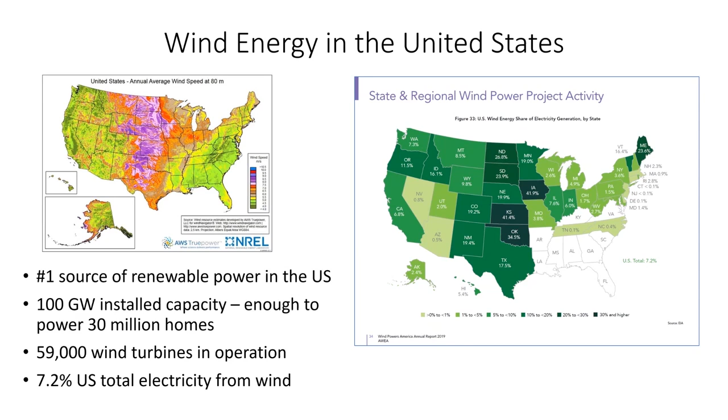The state has about 15,000 wind turbines. Again, that's a good number relative to the 60,000 that are in the country. And what is interesting is that we produce much more than the average. The average in the country is 7% electricity from wind, but this state is producing 17.5%. Something that is not well known, but is very important to mention, is that wind energy is good business for Texas.

The state receives almost $300 million in state and local taxes, which is a great source of revenue. And owners of land are receiving approximately $200 million in annual land lease payments from the wind projects. So bottom line is Texas is really king in wind, and if Texas were a country, it would be number 5 in the world in terms of installed capacity.

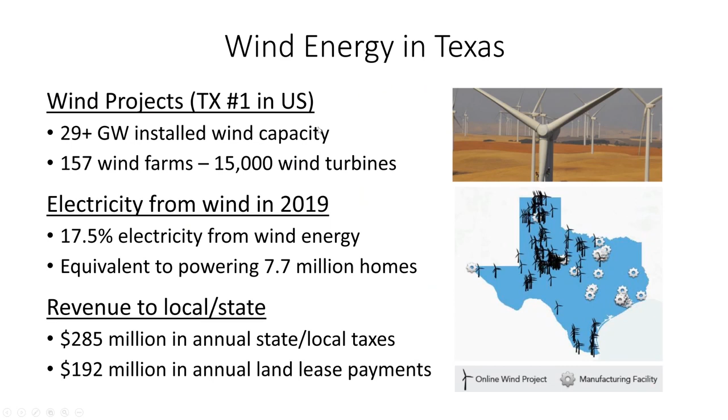So what are we doing at UTD, given the fact that we are in a state where wind is so important? Well, we have a group. We call ourselves the Center for Wind Energy at UTD, or UTD Wind, as one of my colleagues once suggested.

The goal of the work we do is very simple. The name of the game in research and development to support the growth of the wind industry is costs. The United States wants to get to 400 gigawatts—4 times what we have today—by 2030, with penetration levels of 30% or even more in the electric grid. So to do that, we need to continue working in order to lower the cost of wind energy.

And we do two things. We do research that is transformational, where we're trying to discover new concepts for the production of wind, the transmission of wind, the interaction of wind with the environment, and research that is more translational or applied, where we take ideas that have been tried elsewhere or are known to be good, and we apply them to wind because they have not been applied before.

In terms of our mission, we want to put people together—the more the merrier. So we want to connect researchers in industry, in universities, with students in order to enable our activity. An important part: we are a university, so students are central to our mission, and we want to train the next generation of wind energy innovators.

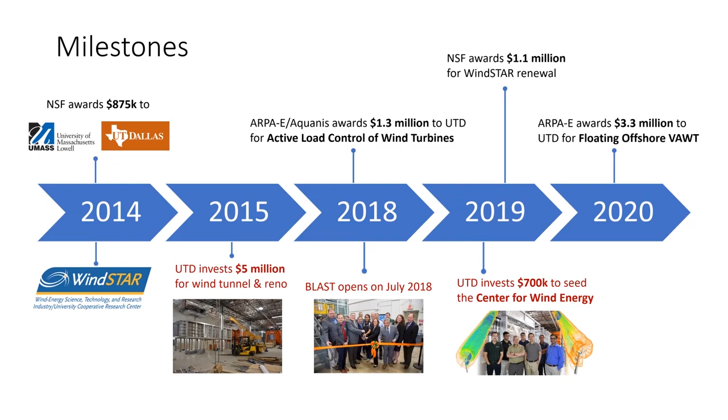I have a slide about these two, so I don't want to spend a lot of time here. But this is the sequence of events that took us to where we are today. So WindStar, what's WindStar? WindStar is the NSF Center for Wind Energy Science, Technology, and Research. That's the acronym for it, WindStar. It has a website, shown down here.

I'm going to turn my cursor into a pointer. So this is the collaboration between UT Dallas and UMass Lowell. The mission is to conduct research of significance and relevance to the wind power industry and produce the workforce at all levels - leaders that could come with new innovations and contributors that can take some of the research that we do in WindStar to their companies.

The entire concept of these centers is that NSF gives us money for operations. That's why the grants from NSF are not huge. And then we are supposed to raise the funding for conducting projects from the member companies. So this time we have 15 member companies.

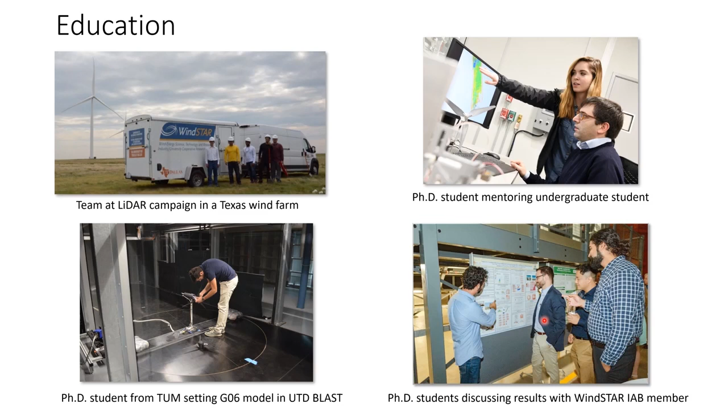On the left-hand side at the top, you see a group of students with a mobile station going to make wind measurements at one of the Texas wind farms. On the right-hand side at the top, an undergraduate student and a former graduate student, now a postdoc, discuss computational results. On the bottom left, there's a student from the Technical University of Munich who came to our wind tunnel with his small wind turbine, the G06, to do some testing. On the right, you see interactions between graduate students and members of industry in our industry advisory board for WindStar talking to one another.

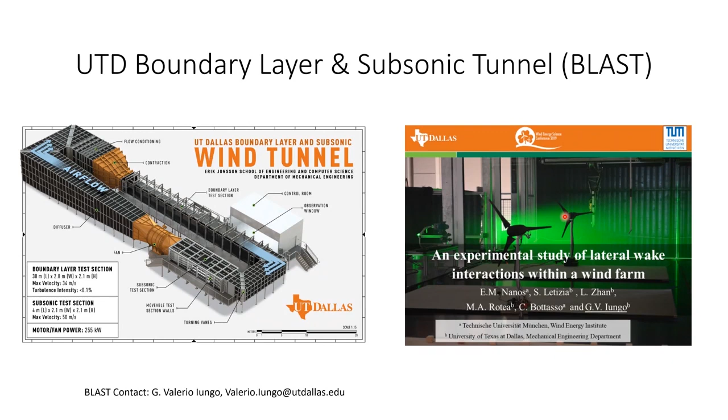So, facilities—what do we have? I mentioned the wind tunnel. I again acknowledge the vision and support of David Daniel and Mark Spong to get this off the ground. It's phenomenal—there's only one of a kind wind tunnel like this, with a very long test section to create, at scale, real conditions for the flow that wind farms see. On the right you see the two turbines from the Technical University of Munich, from the first paper I believe we did with them, making measurements of their wakes and power production in BLAST. If you want to know more about this wind tunnel, you should contact Dr. Iungo.

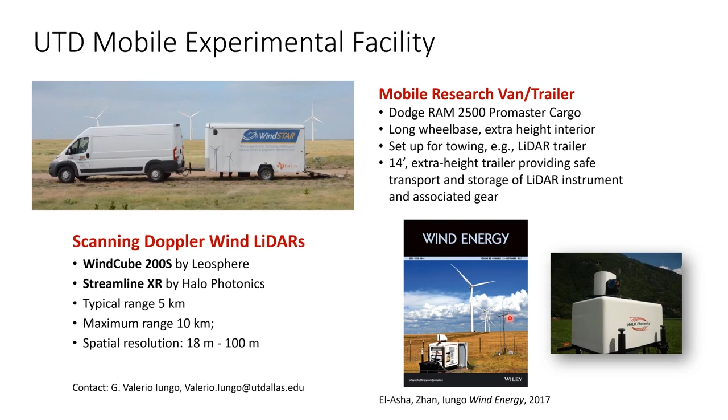This is the LiDAR facility—a truck with a trailer that has all the instrumentation. We have two LiDARs. A LiDAR is like a radar, but instead of using an electromagnetic signal, you use light, a laser, to get a return and estimate the wind velocity of particles in the air. One of them is shown here on the cover of the most prestigious publication in wind energy today, called Wind Energy by Wiley—this is the cover of November '17, where Professor Iungo and his students published an important paper on how to use a LiDAR to extract information necessary to predict the wind, and from there, diagnostics on the ability of a wind farm to produce power.

Okay, so I've given you an overview of the center, facilities, people, and motivation for what we do, and I know some of you in this audience are students. So how about the research? I'm going to pick a topic that I know, which is control of wind turbines, and describe some of the work we've done in this area.

This topic is extremum seeking control. Extremum seeking control is essentially an algorithm used to maximize power production in a particular region of operation of a wind turbine—called region 2. Region 2 is the wind speed range where the generator is running at an RPM and rotor speed not exceeding its rated value. How do we use this algorithm?

It can be used in two modes: for a single wind turbine, or for a wind farm if we allow coordination of the different controllers for the different turbines. What it does is continuously retune the machine so it operates at peak performance, or continuously retune a wind farm so the turbines don't fight each other for the wind, but cooperate and collaborate in order to maximize the power they can extract together.

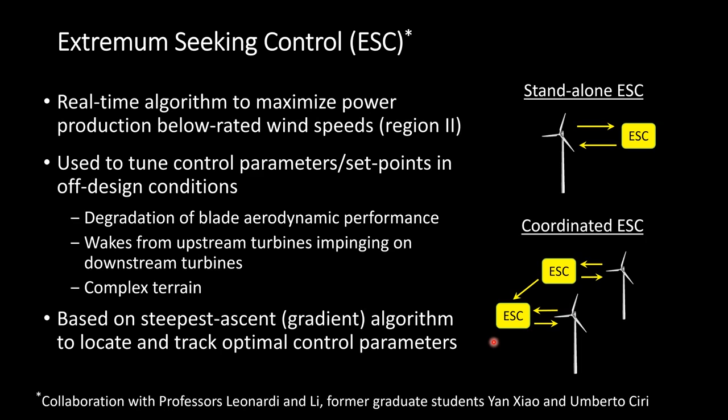The way power is produced in this region depends on how much wind you have. There is a critical speed that we call the V rated, the rated wind speed, and at that speed and beyond, the power output is constant—this is the rated power of the generator. You buy a generator that is a 3.6 megawatt generator, the rated power is 3.6 megawatt. You buy one that is 2 megawatt, the rated power is 2 megawatts.

Below rated is where you depend a lot on the aerodynamics of the machine and where you want to maximize efficiency. So what is the power extracted by this machine when the speed of the wind is below rated conditions? That power is essentially proportional to the power available in the wind. The proportionality is the efficiency, the aerodynamic efficiency of the machine—there's also an efficiency for the generator, but I'm going to just focus on the aerodynamic efficiency of the rotor, and we call that CP. The power available in the wind is proportional to the swept area of the rotor, which is proportional to the square of the radius of the blade—this is why longer blades are better. It's also proportional to the cube of the wind speed in this region, so this is the cubic function of wind speed.

So how is that done in a real machine? In region 2, the machine is controlled by controlling the speed of the rotor. In the wind power community we use this nomenclature called the tip speed ratio. Essentially, the tip speed ratio is the linear velocity of the tip of a blade—the angular velocity of the rotor times the length of the blade, the radius of the rotor—divided by the incoming wind speed V perpendicular to the rotor. We call that number lambda, and that's the tip speed ratio. Now if you were to plot for a typical turbine the efficiency, the aerodynamic efficiency or power coefficient of the machine as a function of the tip speed ratio, you get this.

If the tip-speed ratio is very low, there is no power. If it's very high, there is also no power. There is a sweet spot. If you operate at that tip-speed ratio, you maximize your efficiency and get the most power for the given wind.

So the name of the game with speed control is to keep operating at this optimal point, the optimal tip-speed ratio. In this case, this is a 5 megawatt turbine model from the National Renewable Energy Laboratory, and it has a 0.5 CP max at about 7.5 tip-speed ratio. These machines, I don't think there is one with efficiency bigger than 50%.

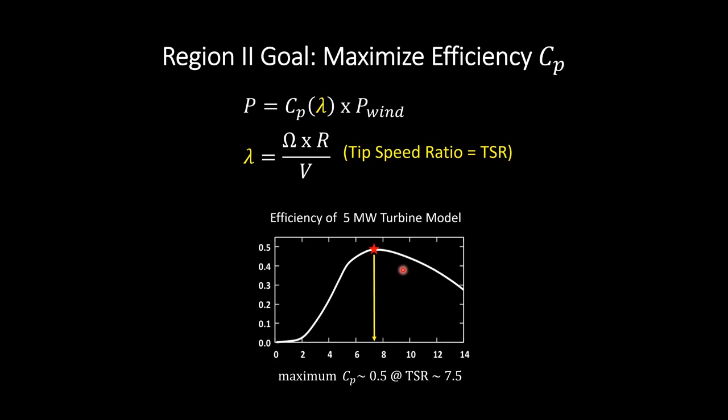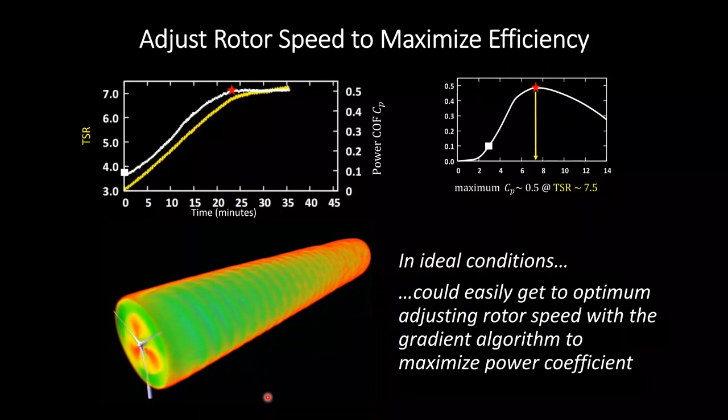So using extremum seeking under very ideal assumptions is quite easy. If we could adjust the rotor speed instantaneously, measure the power with no turbulence, no noise in our measurement, and no changes in wind direction, then this problem is easy to solve. But the reality is different.

And the reality, first of all, does not allow us to control speed instantaneously. In your cars, you cannot change from 20 miles per hour to 60 miles per hour in no time. You need a force, a powertrain, a force actuator to achieve that. Here, what is used is the generator torque. The generator that captures power from the rotor and puts it into the grid requires a torque, and the reaction torque of the generator is applied to the rotor, acting as a sort of brake.

You can imagine a bicycle. You're at the top of a hill, and you start speeding up. You want to reduce your speed, so you touch the brakes. That's a reaction force that slows you down. So you can think of the generator torque as a brake on a bicycle.

It turns out that in order to operate at this optimal CP and optimal TSR, you have to choose the generator torque as an appropriate function of the generator's rotational speed, omega g. That function is essentially a constant times the square of the generator speed. It could get more complicated than this, but this is the beginning.

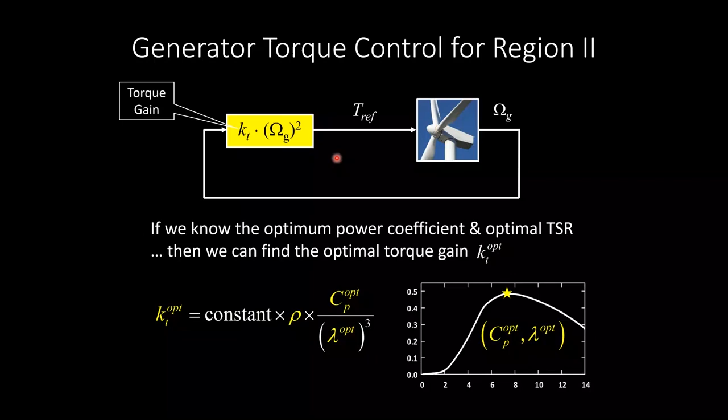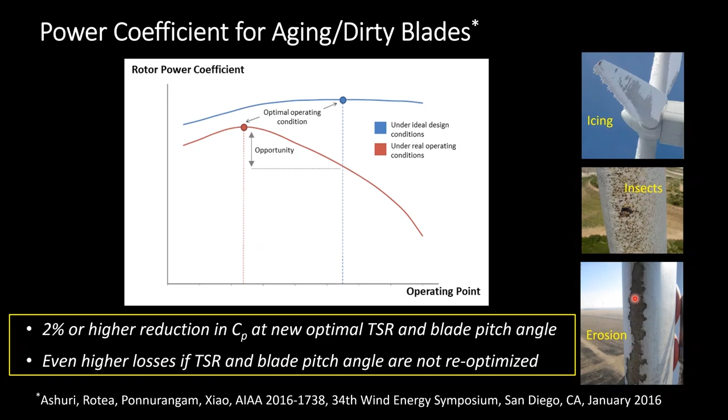Our answer to that is what we call extremum seeking control, where we make measurements of the rotor power, then go through an algorithm that I'm not going to get into the details of. That algorithm can adjust two of the main parameters that control the aerodynamic efficiency of the blade: the torque gain KT that I mentioned earlier, and the blade pitch angle. The algorithm has some good properties, and doesn't require a lot of information in order to set it up.

In terms of measurement, we don't need to measure the wind. That's a big thing, because measuring the wind is not easy unless you're willing to pay a lot of money and get a LiDAR on the machine. This algorithm can be used to control the torque gain, the pitch angle, or both together.

I need to start accelerating here. So we did an implementation of this in an experimental machine that is owned by DOE at the National Renewable Energy Laboratory. It's called CART3, and it's shown here. This is a 600-700 kilowatt machine, fully instrumented in order to do control studies. And when we did the test...

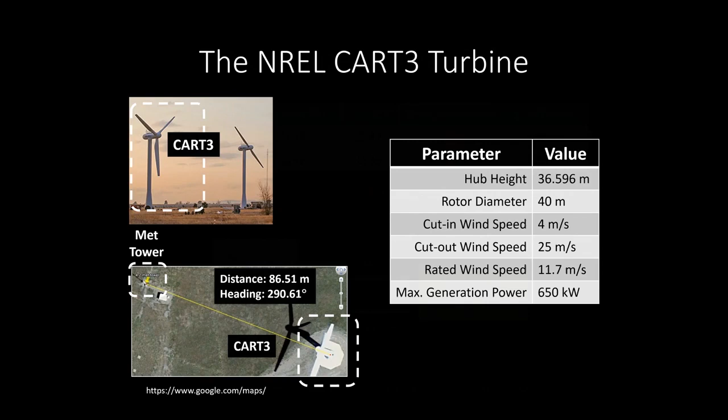We applied our algorithm to a baseline controller that was set. This machine has an optimal CP, calculated under a number of assumptions, that is 0.47. We started with a controller that the machine had, producing an approximation of the power coefficient — which is essentially the power produced by the turbine divided by the power available in the wind — that was 0.38.

Then we let that machine run, we applied our ESC, and we increased the estimated power coefficient to 0.42. So that's a 12% improvement. We did the same for the pitch angle, which is the angle these blades make relative to the wind, and we took it from a baseline of 0.32 to 0.35, which is an 8% improvement.

The difference in improvement had to do with several factors, and one of them is that the torque gain experiment was done in the summer — no ice, nothing funny on the blades, maybe some bugs, but not that many. In the winter, there was some ice on the blades, which changed their aerodynamic properties. So we published this work.

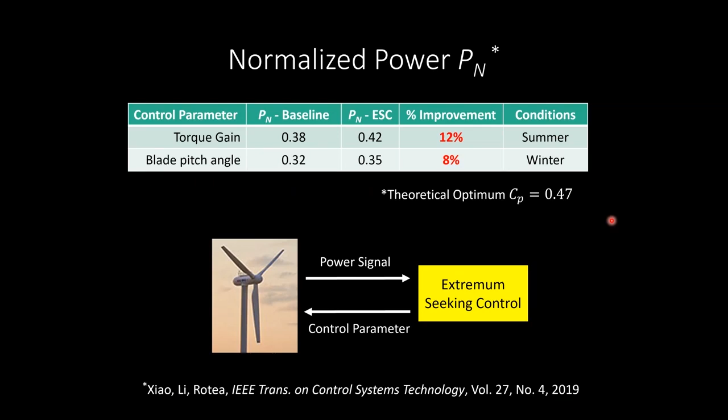In terms of improvement and impact, we have learned that ESC can improve power production. This experiment had a limited amount of data, and with the data we had, we were able to do some statistics, and we can say with 90% confidence that our improvement is going to be at least 3 to 4%. We may not get 8, we may not get 12, but we should have confidence we can get at least 3. And of course more testing is needed, but these results were encouraging.

And why is this important? Well, we talked to people in industry. These numbers are a little dated now, they could have changed, but we were told by members of the Industrial Advisory Board of our center that a 1% increase in annual energy production for a wind turbine could translate into an increase of revenue between $3,000 and $5,000 per year per machine.

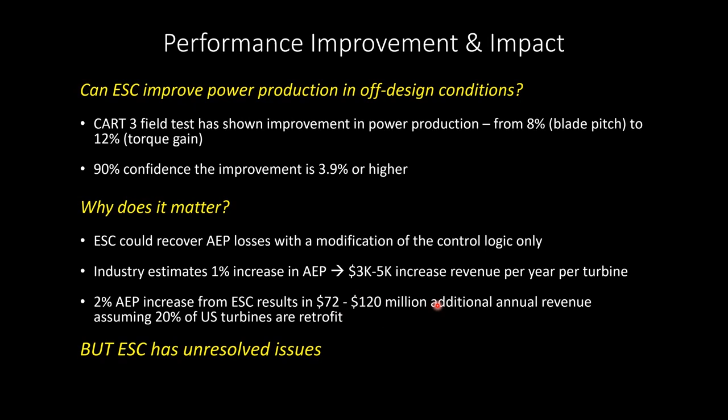So if you take these numbers, you assume a 2% increase in AEP by applying this ESC, and you do this as a retrofit to roughly 20% of the 60,000 turbines in the country, you're going to have extra revenue between $72 million and $120 million. So that is very promising, very encouraging, and we should do this algorithm more and more. But unless we get into some details of how extremum seeking control works, we may not be able to realize this benefit. There are some unresolved issues.

So we continue the work, and I will try to be very quick on this. I said earlier that extremum seeking control aims at taking you to the peak, the top of the power curve, the power coefficient curve. Essentially, you know you are at the top when the slope is 0 - you neither tilt to the right nor to the left. So the extremum seeking control is essentially using a measurement of power to take it to the point where the slope of the power relative to the control parameter, that's your hill climbing mechanism, and it could be the tip speed, the torque gain, or the blade pitch.

So the derivative, which is the slope relative to that control parameter, needs to go to 0. If you hit 0 with that, then you know you are at the peak, because this function is a unimodal function of the parameter that we are using to control it, be it the torque gain or the blade pitch.

But when you look at the power that comes out of the turbine as a function of the control parameter, let's say the torque gain, and the wind speed - the power is proportional to the power available in the wind times the efficiency. The power available in the wind depends on the cube of the wind velocity. And the wind velocity in region 2 can go from 3 meters per second to 9 meters per second. That's a factor of 3. So 3x, then 3 to the cube is 27, so you can see a factor of 10 change in the properties of this feedback loop.

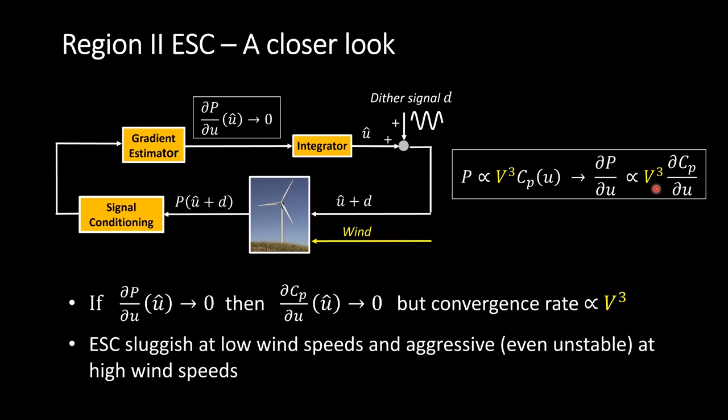So a few years ago, I asked the question: is there a measurement or a transformation of the power signal that I can find, such that if I maximize that new function, I'm also maximizing power, but the derivative of that function with respect to the control parameter is independent of P wind? And the answer is yes, that transformation exists, and it's the logarithm. If you take the logarithm of this product, then you have the sum of the logarithms. If you calculate the derivative of this logarithm with respect to the control parameter, this term completely drops, and you are essentially proportional to the power coefficient.

So if you could actually take the derivative of the logarithm with respect to the control parameter, you are essentially maximizing the power coefficient. This was a very nice theoretical observation, which is also very simple. So then we apply this gradient to the gradient ascent algorithm that says: adjust the derivative of the control parameter with respect to time proportional to the gradient that you measure, so that when you are in steady state, this gradient is 0 and this quantity is 0, and as a result you are at the peak of the power curve. And the transient response of this loop does not have the wind speed in it, and as a result is completely insensitive to that.

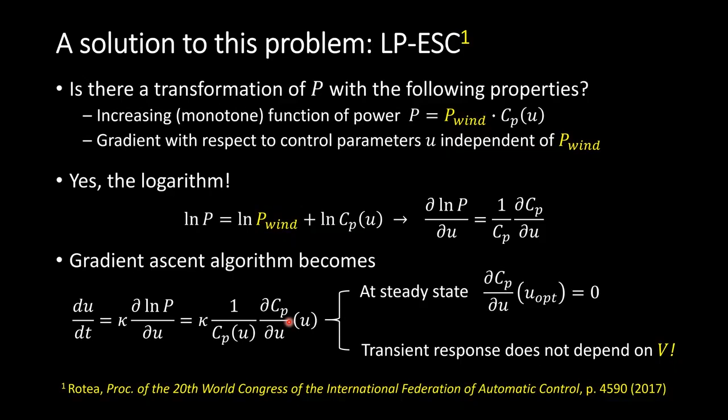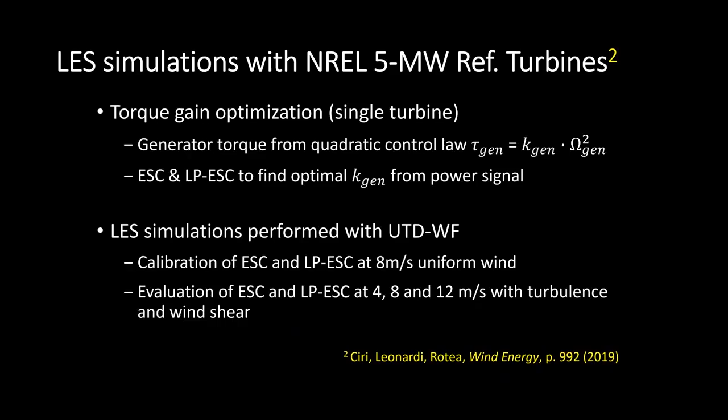So then I got together with Professor Leonardi and a former student, Umberto Ciri, and we did some simulations using the high fidelity large eddy simulation capabilities. And we looked at how well this idea was performing relative to the baseline, or the naive ESC, I would call it. So what we did is take a model wind turbine, calibrate it at 8 meters per second wind speed, and then evaluate it at two other wind speeds, 4 and 12. Now I need to move really fast. So this is the calibration stage.

Apply two other wind speeds in region 2, a lower one of 4 meters per second and a higher one of 12, and we see what I told you. At 4 meters per second, the vanilla ESC takes very long to converge—in fact, quite a bit. We started with 10 minutes and now we are at 50, so 5 times longer. And if the speed is very high, the algorithm becomes unstable. Here we're hitting zero power, even negative power. So you cannot use this in a real machine.

On the other hand, if you go to the log power ESC, the three time series for the three wind velocities are sitting one on top of each other. This shows consistency across different wind speeds, repeatability of the algorithm as calibrated, and is a very encouraging result to go to the field with something like this.

So what have we learned after doing this research, and what have we learned in today's presentation? Wind turbines have a sweet spot when they operate at peak efficiency. That sweet spot could change due to a number of factors over the lifetime of the turbine.

LPESC is an algorithm that allows you to retune to the new sweet spot every now and then. We actually have a patent on this, and we are in conversation with a company to license this technology.

The algorithm itself could be a good retrofit for aging turbines, or turbines put in off-design conditions, such as complex terrain that was not taken into account when the machine was designed.

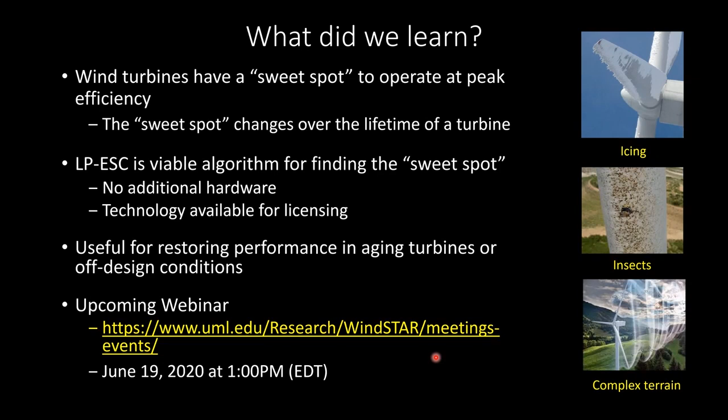We definitely want to have an impact in the scholarly community of wind energy. We want to develop technology of value to the industry. This is an area where impact at the end of the day is going to be measured by, can we save money for this industry?

The process of writing great papers and producing great innovations should be done with students. So we want to use this as a mechanism to train the next generation of wind energy innovators. Already in the center we have 16 faculty members, but this is not enough.

We also have 15 companies in WindStar. We have our faculty colleagues at UMass Lowell, and we continuously seek public-private partnerships to increase our capacity to perform the work. At this time we have resources—we can bring new PhD students, postdocs, research scientists, and other collaborators to work on capstone projects.